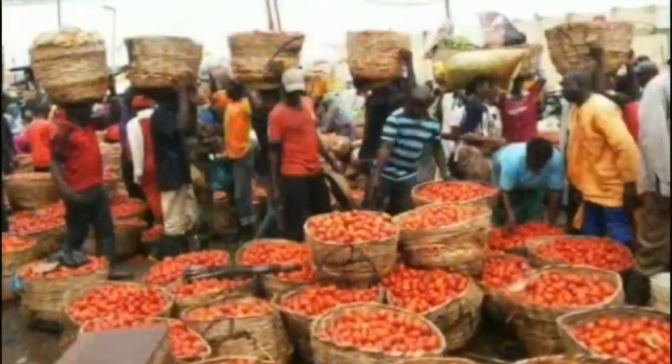Thank una plenty. Shall move forward, forward. We are so proud to be Ambazonians. Ambazonians shall move forward, forward. We are so proud. Welcome.

This video is a virtual construction guide for a solar-powered food dehydrator and was commissioned by both Amber Farmers Voice and Liberty University School of Engineering. This guide follows the step-by-step process of building the solar food dehydrator designed by Team S2-1 to meet the needs of the partners of Amber Farmers Voice.

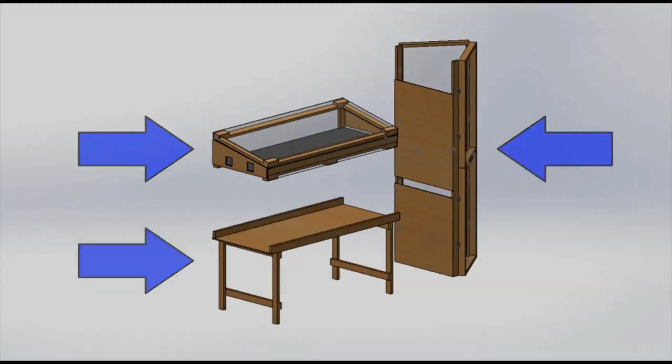The dehydrator is designed in 3 sections: the table, the dehydration chamber, and the chimney. Each section is built separately and combined later to create an efficient and portable system. Constructing the table. The tabletop is the first part that needs to be built. This component will support the dehydration chamber and provide structural stability to the entire system.

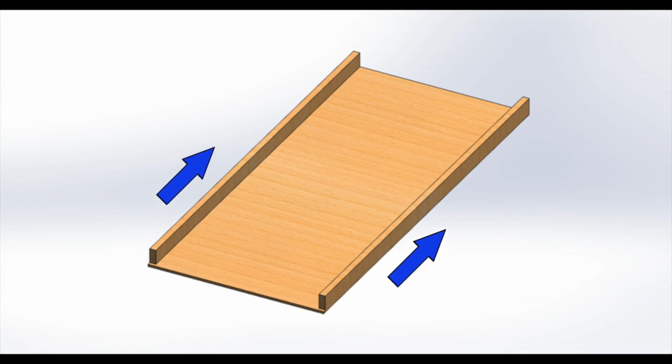The materials needed for this piece are 1 wood sheet, cut to 2.44 meters by 1.22 meters, 2 wood boards, or 2x4s, cut to 2.44 meters, and several nails that are around 7.5 centimeters. Arrange these boards on the wood sheet so that they run parallel to each other along the edges of the sheet. This will place them just over 1.02 meters apart.

It is crucial that these boards have at least 1.02 meters of space between them. The goal is to have that distance be as close to 1.02 meters as possible without going under. Once in place, nail the boards to the sheet. The tabletop is now complete.

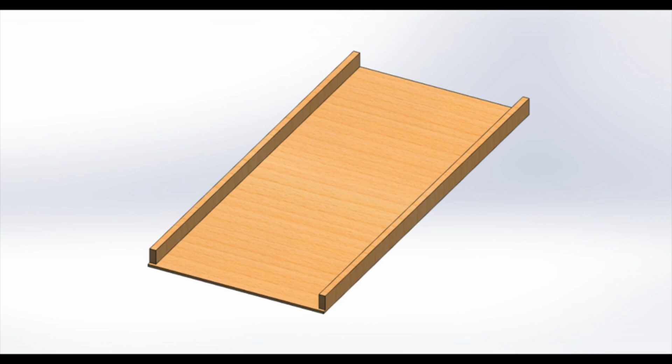Constructing the legs. Next, the table legs should be built. The materials needed for this piece are 2 boards cut to 1 meter, 2 boards cut to 1.1 meters, nails, and hinges. Each set of legs will require 4 boards in total. Each tabletop requires 2 sets to function properly. Therefore, this process should be completed twice.

Take the 2 1-meter boards and place them down parallel to each other. These will be the vertical parts of your legs, or uprights. Next, take one of the 1.1-meter boards and place it perpendicularly to the 2 1-meter boards as shown. This piece will be the upper crossbar of the legs and connect the assembly to the tabletop later on. Make sure this board is flush with one of the ends and sides of both uprights.

Once in place, nail the boards together. Our recommendation is to use 2 nails per mate in a diagonal pattern. That way, the strength of the mate is maintained without sacrificing materials or the structural integrity of the wood.

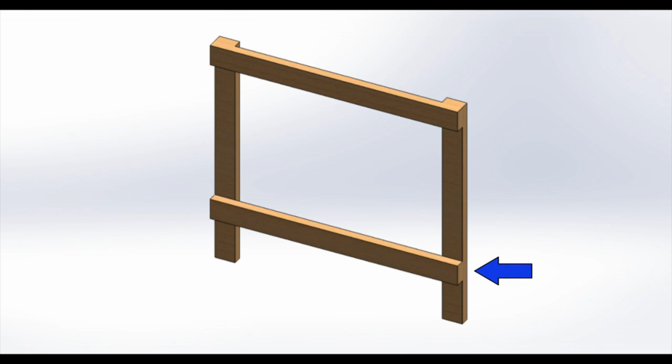Next, take the second 1.1-meter board and place it 20 centimeters from the other end of the uprights. This provides stability in the leg structure. Be sure to line up the ends of this lower crossbar with the outer sides of the uprights. Make sure that both crossbars are connected to the same face of the uprights.

Once in position, nail into place. The last components are the hinges. This model shows 2 hinges per leg. We recommend using at least 2 hinges and, through testing, have found that a 3rd hinge adds significant strength.

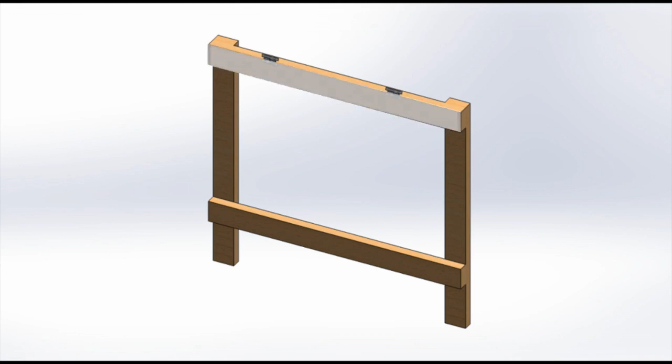These hinges should be mounted on the upper crossbar on the inner face, which is highlighted here. There should be 23 centimeters of space between the hinges and the thin side of the leg structure. A 3rd hinge can be added in the center if desired.

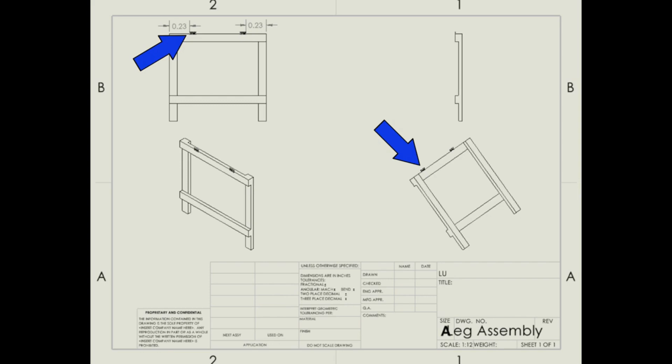Mount one side of the hinge to the inner face and let the other side rest on the top face of the upper crossbar. This means that the hinge's joints should extend slightly past the top face of the crossbar. This is ideal for stability. Repeat this process to build the 2nd set of legs. Once finished, the legs are complete and ready to be installed on the tabletop.

Table assembly. Now we can assemble the table. The materials needed to complete this section are 2 leg assemblies, the tabletop, and a few more screws. The best way to assemble the pieces is to first set the tabletop upside down on the ground. This allows easy access to the underside where the legs will be mounted.

The predefined front face of each leg will be oriented towards each other. The free side of the hinges will extend away from the leg assembly and towards the center of the table. Basically, the 2nd side of the hinges will be mounted here and here, on the inner side of each leg.

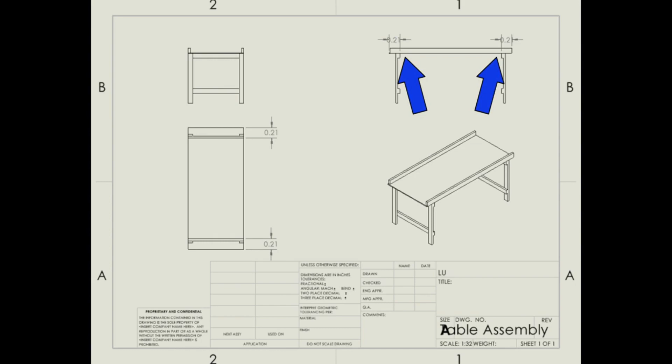The front face of the legs should be positioned across the width of the table, 21 centimeters from the end of the wood sheet. This allows for sound structural support while still giving the legs space to fold up under the table for transportation. Once positioned, the hinges can be mounted. The screws will most likely break through the opposite side of the wood sheet. This is expected. The screws pose no safety hazard once the dehydrator is fully constructed and assembled.

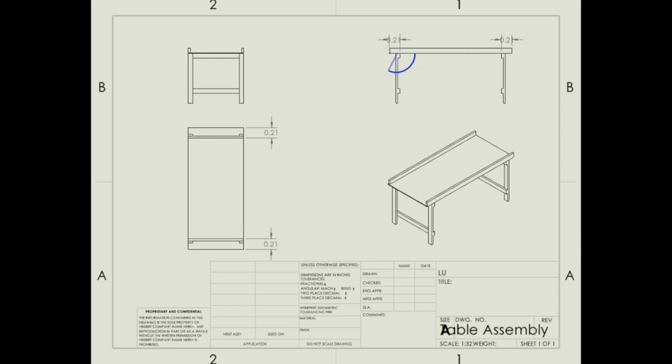The table is now complete. Turn the table over and fully extend the legs. If they travel slightly past 90 degrees, the table is stable, and you are ready to move on to the next step. If the legs are vertical, the table could be unstable, and the legs will need to be held in position while the dehydrator is in use.

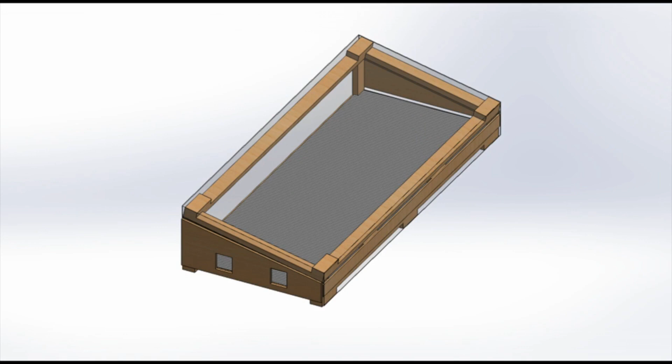Constructing the dehydration chamber. The next section is the dehydration chamber. This is where food items will be placed for dehydration. The stages of this section are the base and uprights, upright supports, lid, wall, and end caps. First is the base and uprights.

The materials needed for this section are 2 boards cut to 2.26 meters, 2 boards cut to 1.02 meters, 8 blocks, which are 20 centimeter sections of a 2x4, 2 long uprights, 2 short uprights, and nails. The uprights come in 2 different sizes. One is 30 centimeters and the other is 10 centimeters. They can be made from a single 2x4 if desired.

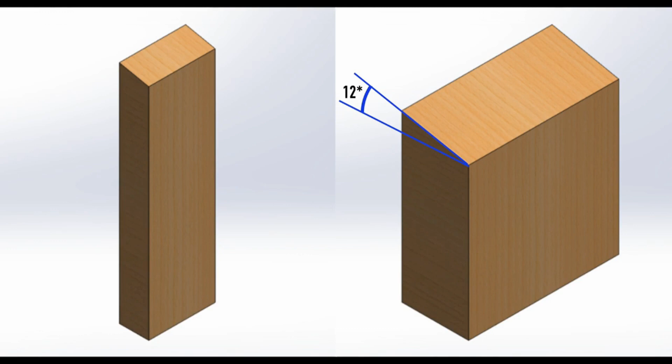The bottom of each one is a square cut, but the tops have a 12-degree pitch as measured from horizontal. The 10 centimeter uprights are measured by their taller face, while the 30 centimeter uprights are measured by their shorter face. Once these are completed, the base can be constructed. First, the uprights must be mounted before the chamber is built.

To do this, take one of the 1.02 meter boards, one long upright, and one short upright. Place the flat end of each upright against the broad side of the 1.02 meter board. Orient the uprights so that their sloped faces fall on the same plane. This places the 2 uprights flush with each end of the 1.02 meter board.

The best way to mount the uprights in these locations is to first nail 2 nails through the underside of the 1.02 meter board at each end, and then drive the uprights onto the exposed nails. Complete this with the remaining uprights and 1.02 meter board.

The next step is to complete the rest of the rectangular frame. To achieve this, blocks will need to be used to connect frame pieces from the underside, as shown here. Connect one block, one 1.02 meter, and 2.26 meter board as shown. The end result will be a rectangular base that is 1.02 by 2.44 meters.

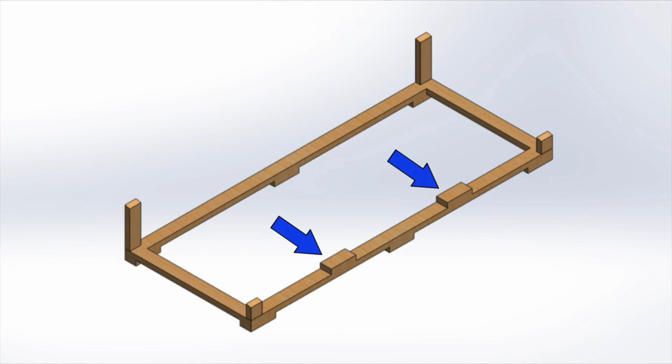We recommend using 2 additional blocks for frame support, which should be mounted at the midway point. The last 2 blocks will be used as supports for the chamber wall, which comes later. Space them out evenly as shown here.

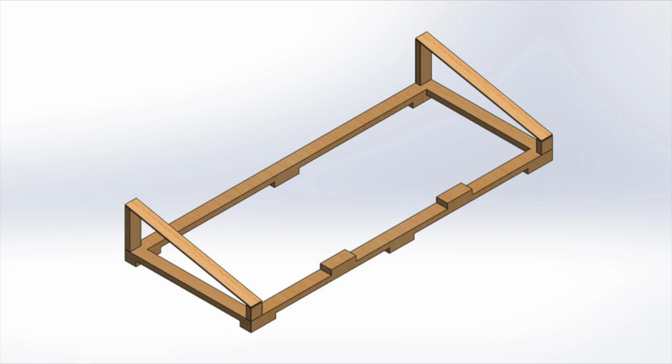Now that the base is finished, the upright supports can be added. These supports are plywood boards that are less than 1 centimeter thick and exactly 1.04 meters long. Mount these supports to the uprights as shown. If the uprights were created and installed properly, this support should cleanly line up with the tops of opposing uprights. Be sure to offset the supports from the back of the long uprights by a ½ centimeter. This is done to ensure adequate space for hinges that will be installed later on.

Next, the chamber lid can be created. The materials needed for this piece are 2 boards cut to 2.26 meters, 2 boards cut to 1.04 meters, 4 blocks, and nails. The lid is very similar to the chamber base. It is a rectangular frame with blocks that are used to hold the corners together. The difference here is that the final width of the lid has a dimension of 1.04 meters, while the length should still be 2.44 meters.

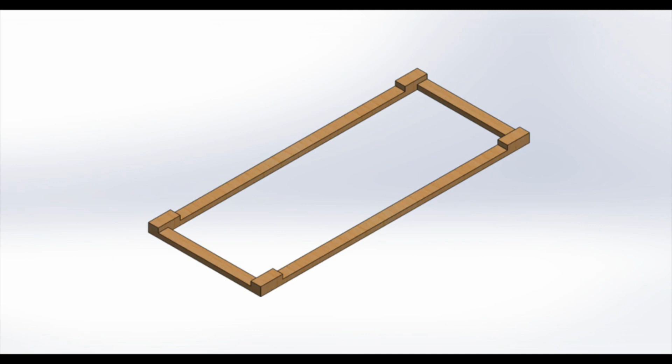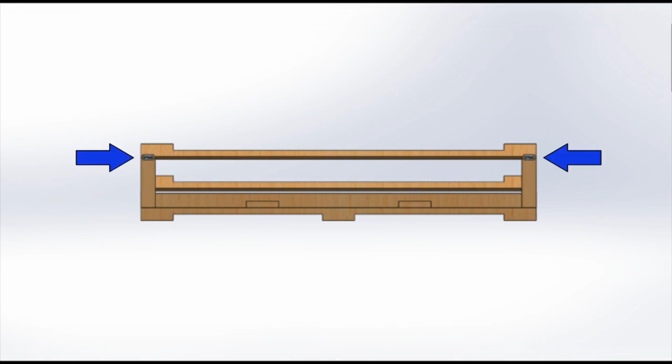When this is completed, the lid can be mounted on the base. The materials needed for this are the completed chamber base, the completed lid, 2 hinges, and screws. This is what the chamber will look like from the back with the lid installed. Here, the lid connects to the base via 2 hinges. Each hinge connects the lid to one of the 30 centimeter uprights. These are the only 2 connection points for the lid. Looking from the other side, we can see how the lid is meant to open and close.

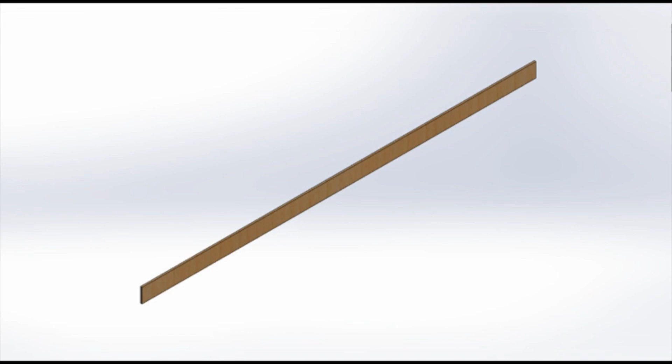The next piece is the chamber wall. This is a longer version of the upright supports. Here, it is 2.44 meters long and is used to insulate the long side of the chamber. It is mounted to the short uprights and 2 of the blocks on the chamber base. Make sure the lid does not rest on this piece. If it does, the system will have air gaps that could affect its efficiency.

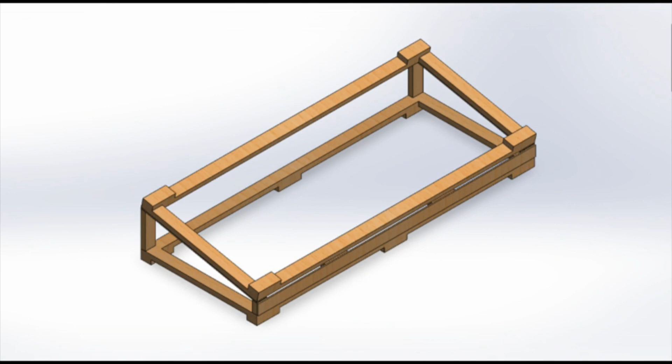The final wooden components of the chamber are the end caps. Although they appear to be identical, save for the holes in the front cap, they are slightly different dimensions. The dimensions for the front cap are shown here. These holes are designed for fans to fit without the need for nails or screws. These caps are made from the same wood sheeting that was used for the tabletop.

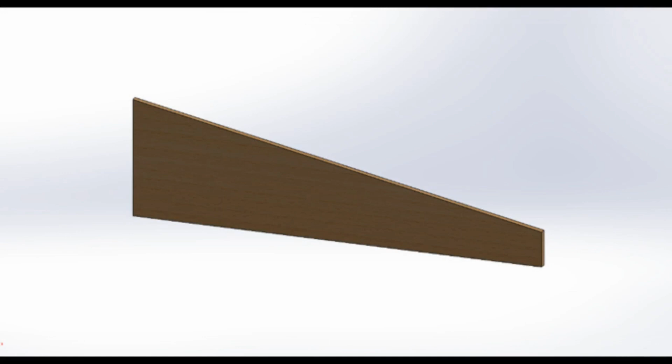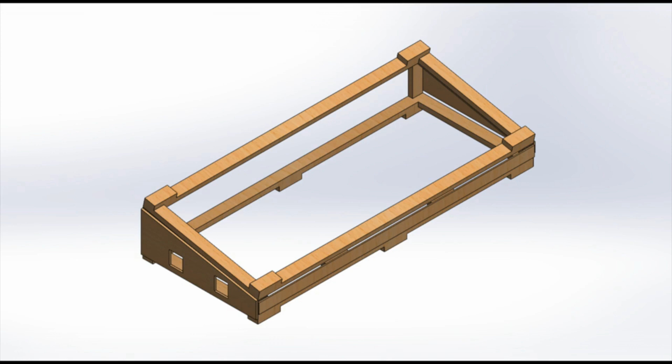The dimensions for the rear cap are shown here. Overall, this cap is 6 centimeters shorter than the front one. This design leaves a gap at the bottom for air to escape. When mounting these caps, be careful to mount the front one to the chamber base and uprights and the rear one to only the uprights. They are both meant to sit flush with the top side of the closed lid.

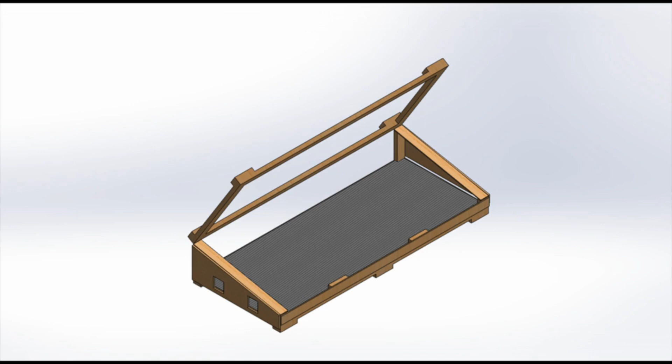The next step is installing the mesh. This is what the food will sit on while dehydrating. To do this, simply cut a section of wire mesh to dimensions slightly smaller than the frame of the chamber base. Nail the mesh into position on the base as shown here. It may be necessary to install bug netting on top of the mesh to prevent food from falling through the openings. The final piece of the chamber is the plastic.

The best way to attach it is to use as few pieces as possible. First, the plastic should be placed over the top of the lid, rather than on the underside, to repel rain as effectively as possible. This piece should extend over both sides of the chamber. It should first be nailed into the lid's frame on all sides, then down each upright and along the back side of the chamber base. The section of plastic that extends past the lid on the front side will serve as a skirt that covers the chamber wall. With the plastic installed, it should be possible to open and close the lid without tearing anything. If this is achieved, the dehydration chamber is complete.

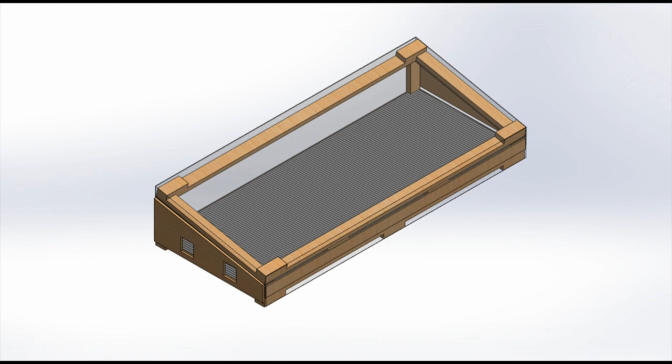Constructing the chimney. The third and final section of the dehydrator is the chimney. There are only 2 types of pieces that need to be made for the chimney. The first is the chimney window. The materials needed for this part are 2 boards cut to 1.5 meters, 2 boards cut to 0.86 meters, and nails.

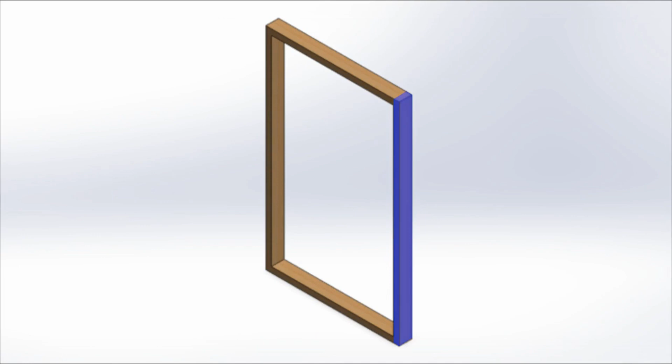Shown here is a completed chimney window frame. The 1.5 meter boards run the entire height of the component, while the 0.86 meter boards join their vertical counterparts at their ends. We recommend using at least 2 nails per corner. This piece will need to be made 4 times and will make up the rear 2 faces of the chimney. The final dimensions of this part are 0.94 meters wide by 1.5 meters tall.

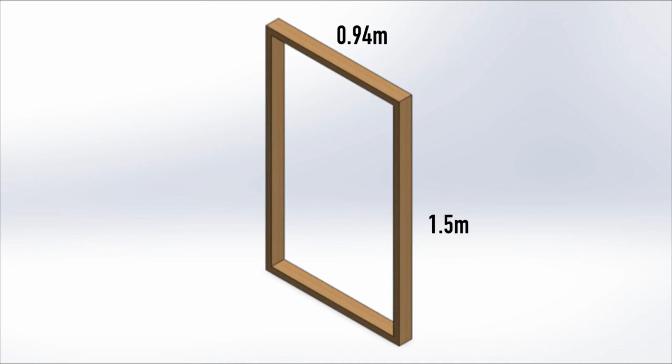The second piece of the chimney is the front face, which contacts the table and chamber. The materials needed for this piece are 4 boards cut to 1.5 meters each, 1 wood sheet cut to 2.45 meters tall by 1.1 meters wide, and nails. The wood sheet needs to be cut 1.1 meters from one end as shown. This will create a gap for the air to leave the dehydration chamber and enter the chimney.

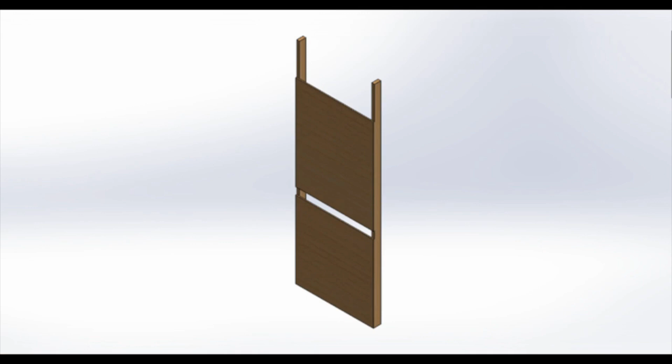The same process to build the tabletop is used here. The chamber face of the chimney and the tabletop are very similar parts. The difference is that a 10 centimeter gap needs to be put in the chimney's face. The boards should be put end to end on either side of the sheet to provide support. The lower boards will connect the 2 sections of the sheet together and the remaining boards will continue up to the full height of the chimney. These upper 2 boards are only connected to the larger section of the sheet. With this section completed, you can begin assembling the chimney.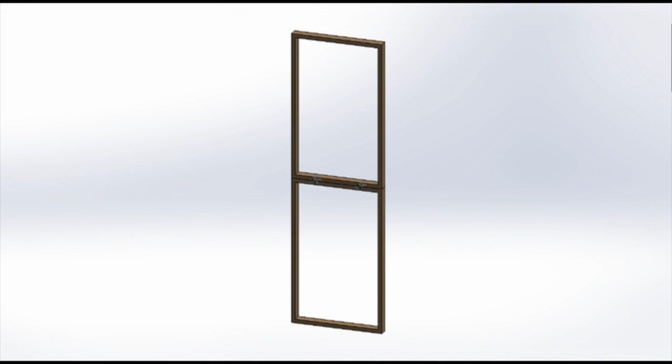The first step to assembling the chimney is pairing the chimney windows together. These stacked windows are connected via 4 hinges, 2 in the front and 2 in the back. Using hinges here instead of nails allows the chimney to collapse for better portability. Complete this step with the other 2 chimney windows. Now you can connect the 2 pairs of windows. Do this by using 4 hinges as shown here. Make sure to mount the hinges on the outside of the windows to reduce gaps in the chimney as much as possible. Do the same thing to connect the opposite sides of the chimney window assembly to the chimney face.

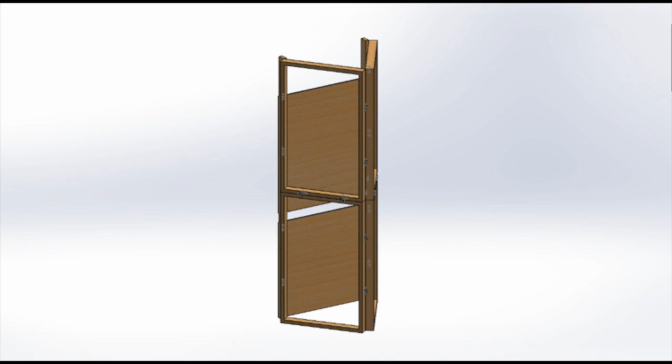The final step is to add plastic sheeting to the windows. 2 long sections are all that are needed for this. Nail the 2 sheets to the inside of the chimney so that each sheet covers 1 stack of windows. Alternatively, 1 sheet can be used per window. This will help with disassembly and portability operations. The chimney is now complete.

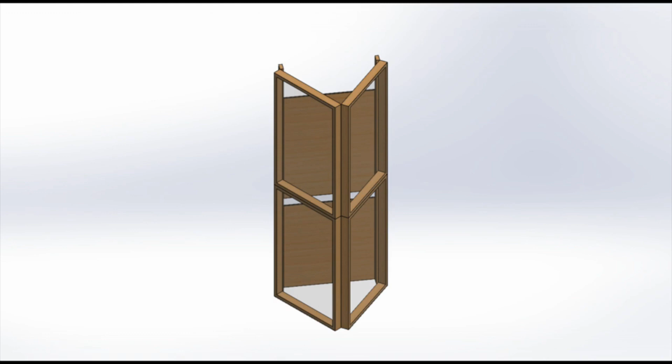Now that each section of the dehydrator is built, you can now assemble the whole system. Set up every component as shown here. One thing that could be added are hinges to the underside of the tabletop that connect it to the chimney. This significantly improves the stability of the system and helps keep the dehydration chamber against the chimney. Be sure to push the chamber against the chimney so the connection is as airtight as possible. If you have access to solar-powered fans, install them in the ports in the front end cap.

When the system needs to be transported, simply remove the pins of any of the hinges with a hammer and nail. This breaks the dehydrator down into several, more manageable parts. Congratulations, your solar-powered food dehydrator is now complete.